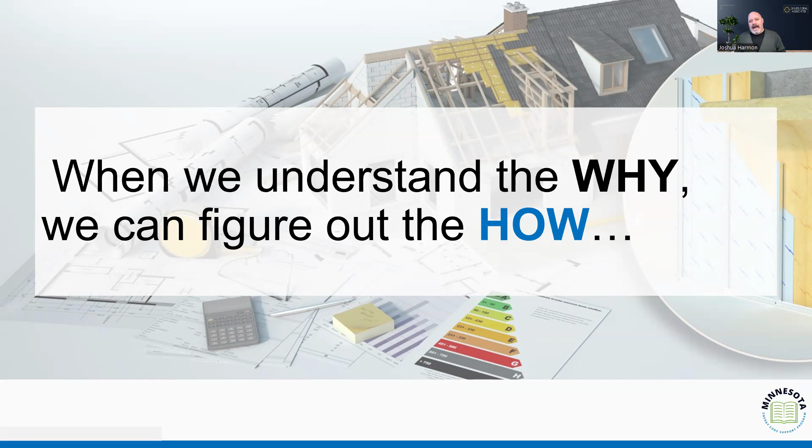So when we think about why we have a residential code, obviously we understand that it's to provide that minimum safeguard for the occupants of residential buildings across the state when it comes to things, and it's based on these minimum expectations when it comes to things like means of egress, structural stability, and light, ventilation, energy conservation, protection against fire and other hazards.

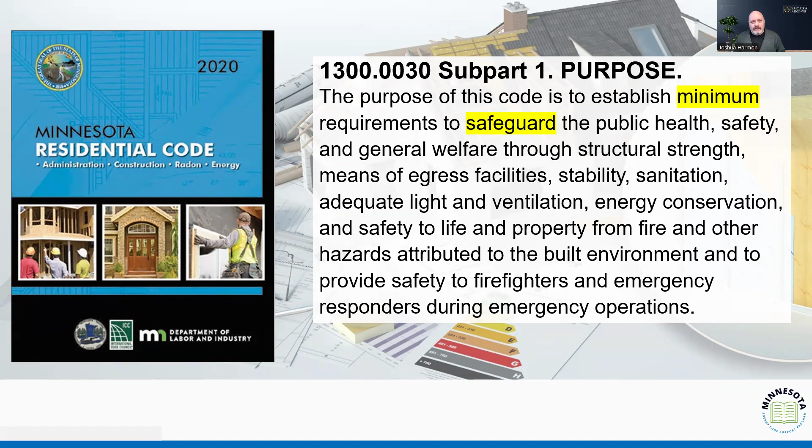So really what it's looking to provide is a consistent baseline for construction across the entirety of the state. I understand it's enforced at different levels in different places based on whether or not certain jurisdictions fall within enforcement apparatuses. But more importantly, this should be the standard that we should be confident buildings are being built to, to make sure that we provide safe housing to people across the state in all areas.

When we think about the relationship between the 2020 residential code and the energy provisions thereof in 1322, we understand that it was adopted as really more of a 2012 version of the International Energy Conservation Code. So that code, whether it was 2012, 2021, or 2024, is going to really look at how do we control things like heat loss, power utilized for illumination, and climate control, right?

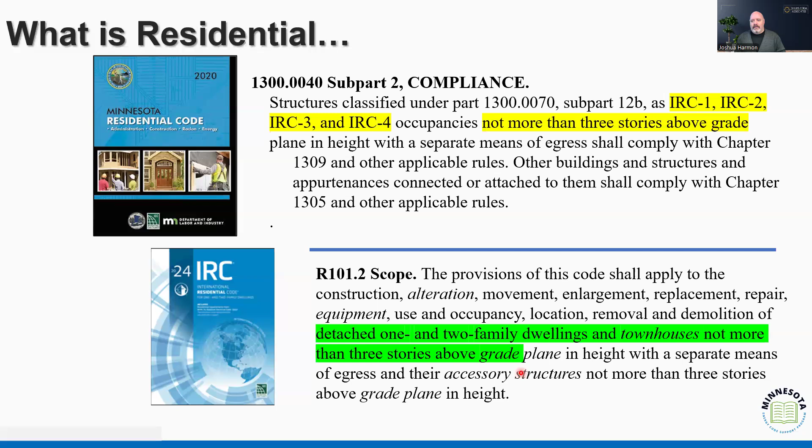Similarly, what we're trying to think about is how we're affecting residential from that perspective. One of the things that's important to understand as we transition, or consider transitioning, to a new definition or a new code, is to look at the definitions.

In the current definition, we talk about single family dwelling units, and we talk about townhouses as those series of units that are connected or grouped in a single building. So we're going to treat each one of those as separate buildings again, and that's kind of what the code is identifying for us.

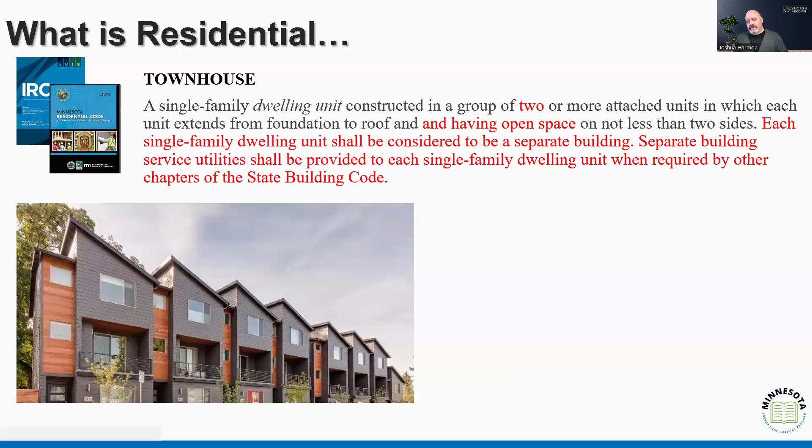That is again mirrored in what we see in the 21 and 24 residential codes, because we start to identify the townhouse as the building that consists of townhouse units, each one being its own separate unit. So the state is a little bit ahead of that, but it's just a little more clarified in the actual text of the code.

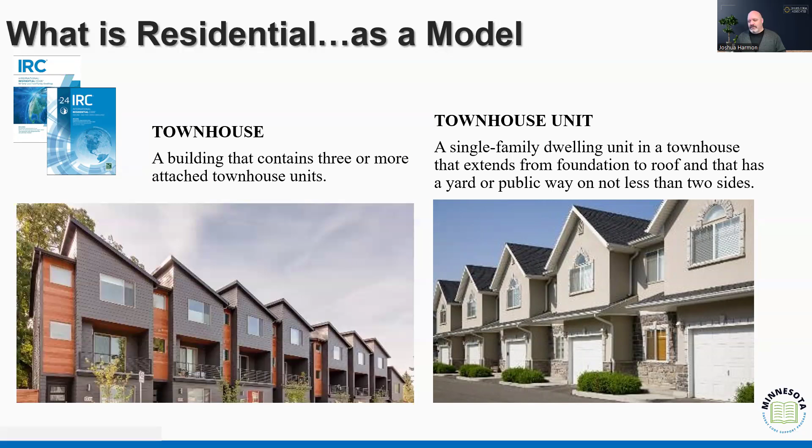So as a model, we kind of have an understanding of what is residential. When we think about it from the perspective of the energy code, looking at it as a model, we understand that the energy code applies within Minnesota to the residential building.

But as we see it identified in further versions of the energy code, we start to again see that expansion of what is residential. Residential becomes this kind of thought of not only the IRC 1s, 2s, 3s, and 4s, but also the group R2, R3, and R4 designations in the model code.

So in the model code, that's what it's intending to address - not just single family, multifamily, and townhouses, but it also goes into maybe the dormitories, the small motels, the transitory places that are again part of that group R2, R3, or R4, as long as they're 3 stories and less above grade.

When we have a mixed occupancy between residential and commercial, then obviously what the code says is residential provisions apply and commercial provisions apply to their respective areas.

I was doing a project, or a webinar, just a little bit ago on multifamily. The project we were looking at during this plan review session was multifamily housing with a retail space in one of the corners. So we had to separate them - the residential provisions apply to the multifamily, to the condos, and then the retail space follows the commercial. We understand that when it comes to energy conservation.

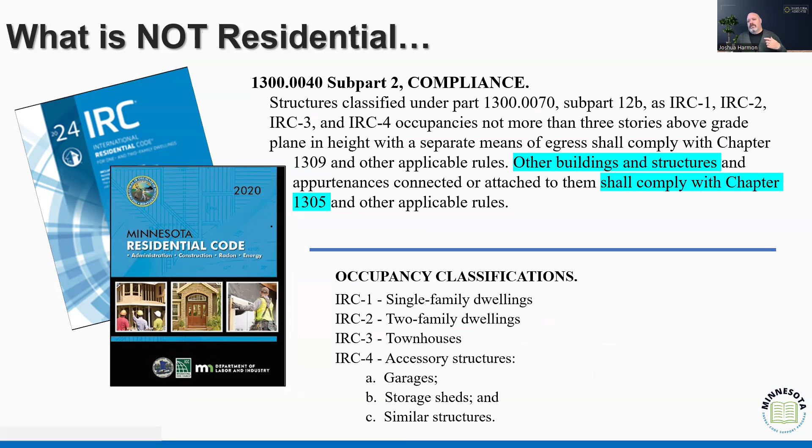When we look at, again, the code reminds us what are those IRC 1s, 2s, 3s, and 4s, and to kind of give us that idea of what's not within the context of the residential code when it comes to the construction components.

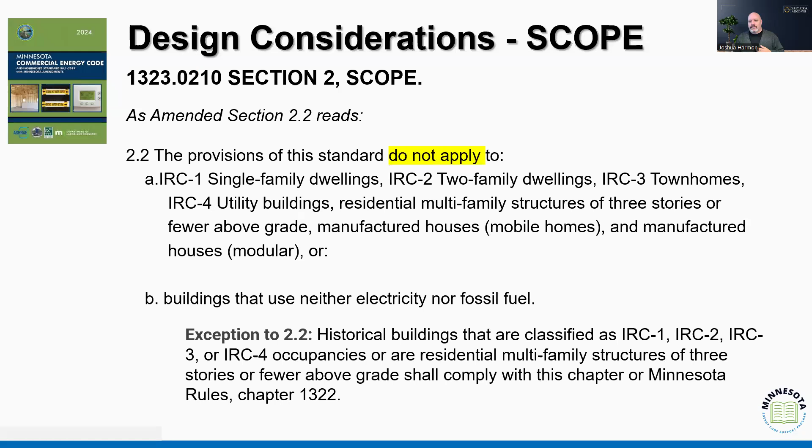When we think about it in the context of the commercial energy code, we've talked about this before - when does that code not apply? Well, it does not apply in those single family, 2-family, townhouses. And it also provides us this expectation of, or recognition of, what is residential.

Again, if we're looking at multifamily buildings, what is residential, what is commercial? Because that is a model, we start thinking about that group R2s - we're looking at the hotels, motels, those timeshares, apartments.

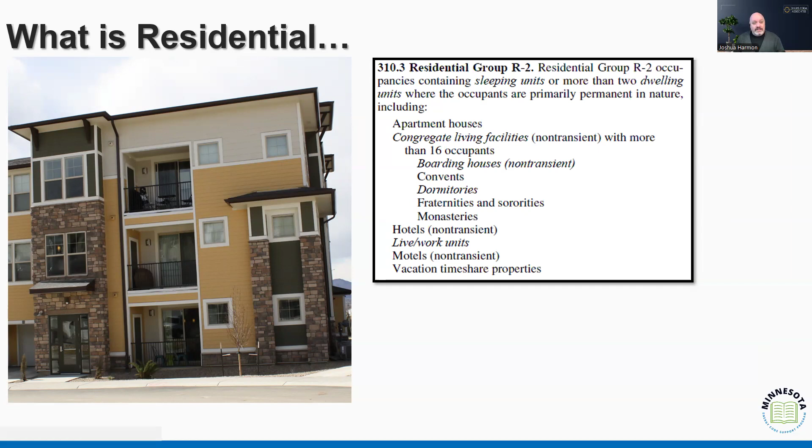Part of the conversation that sometimes gets brought up is, where do Airbnbs start to pull into this? Where do other types of accessory dwelling units start to pull in? We start talking about, is this residential, multifamily? Well, as long as it's under 3 stories, the energy code says it's all part of residential - again, expand the group R3s that are identified in the code, as well as those group R4s.

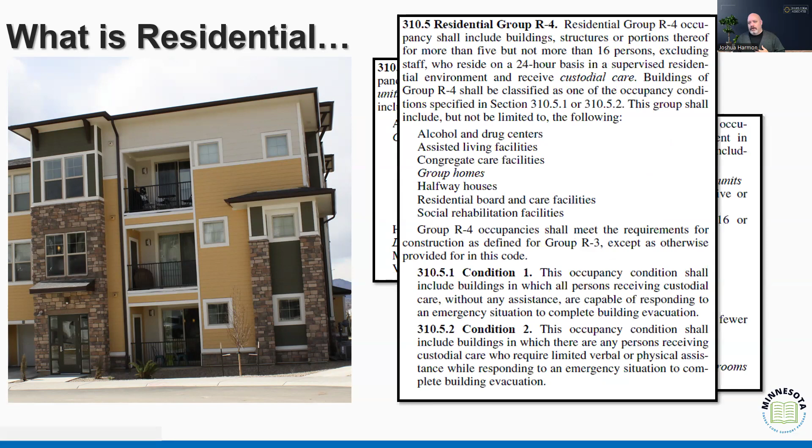So we think we understand when it applies, at least structurally. When does the energy code apply from a construction perspective? We understand the use classification. Now we're looking at it from a construction perspective, and we see that the energy code applies to new residential buildings, those additions, alterations, renovations, repairs, and changes in occupancy or use.

So if we're transitioning from, let's say, an assembly use, and we've bought a building and we're turning it into residential, then again it would need to comply. If we're changing the space conditioning, right? We start to think about taking that garage and turning it into a mother-in-law suite or an expanded bedroom. Now we're changing that conditioning, so we need to think about how the energy code applies. And again, like we talked about, mixed occupancy before.

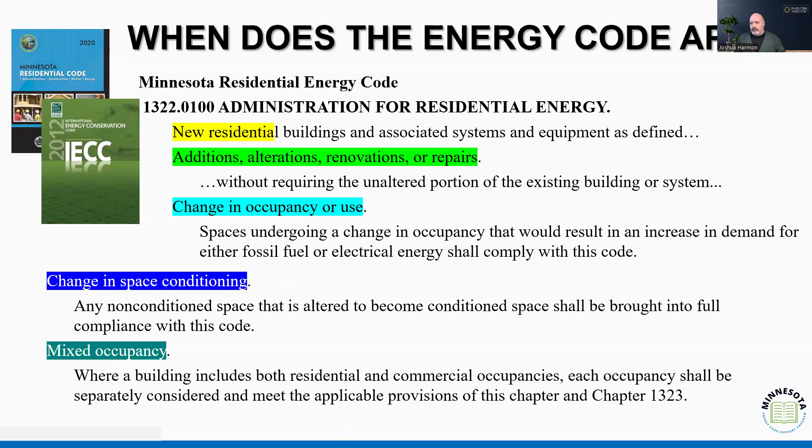So now we have this idea of when it applies and why it applies. Now let's talk about how it gets applied. When we look at what the energy code requires in 1322, we see the list of items. These are items we should be somewhat familiar with. We talk a lot about residential and commercial energy code compliance. We're looking for that basic understanding of how the system is going to comply with those four pillars we generally talk about: the insulation, the mechanical, and the power and lighting.

And then the service water heating systems come in as part of that mechanical and service water heating systems. When we look at the 2024, the major change we see from what currently exists in this particular section is the inclusion of that energy compliance path. We want to know very upfront which compliance path we're utilizing, because that's going to affect a lot of the evaluation we do during plan review and inspection of flexibility within a project.

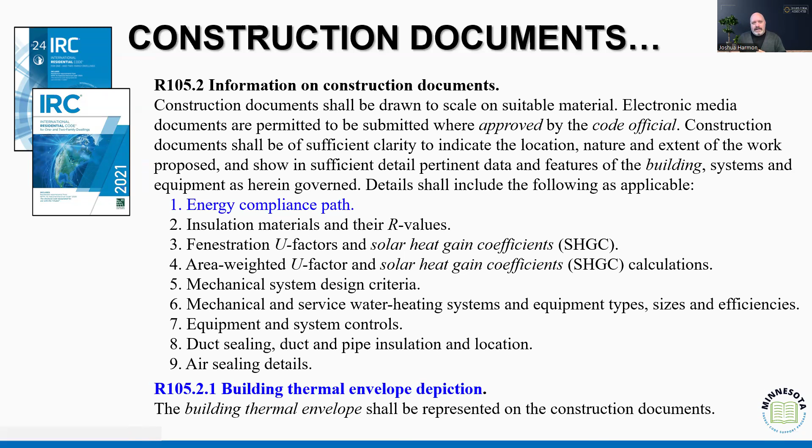One of the things we also see identified is this building thermal envelope depiction. That's one of those concepts that's really, to me, one of the more important things to identify, because it gives us that idea of what am I looking at within this structure to identify where that level of protection needs to be.

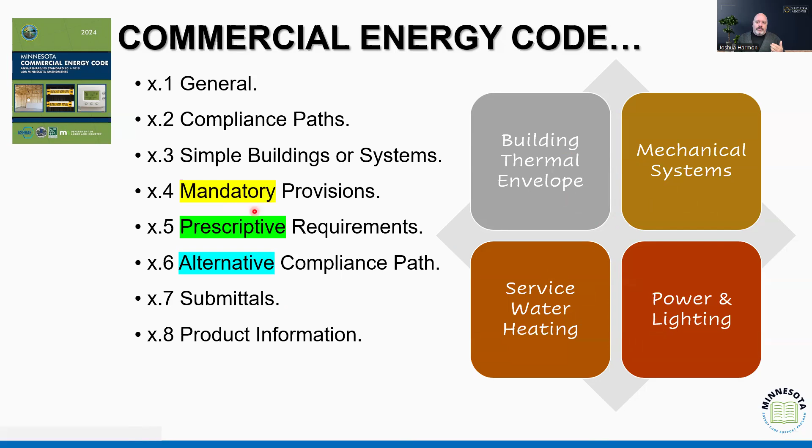When we look at our previous webinars, we talk a lot, obviously, about the commercial energy code. And in that concept, we see the four basic components, and those are identified in specific chapters. We know this in chapter 5, chapter 6, chapter 7, chapter 8 and 9. And then within each of those chapters, they have mandatory, prescriptive, and alternative compliance paths specified for each of those different sections.

When we look at both how the current energy code is organized, we see a very similar structural layout of the code. So we see it identified as those general requirements, where we usually find some basic understanding of how we should install, what are those minimum expectations associated with certain types of features.

But then we start really in chapter 4 to see it laid out as what is the building thermal envelope, what are those systems, both mechanical and service water, and then what's that power and lighting considerations in our simulated performance alternative. So more so in residential, because I tend to alternate service water heating with air barriers. Air barriers are going to be that critical component in residential that we don't always consider as much in commercial, although we know it's important to think about.

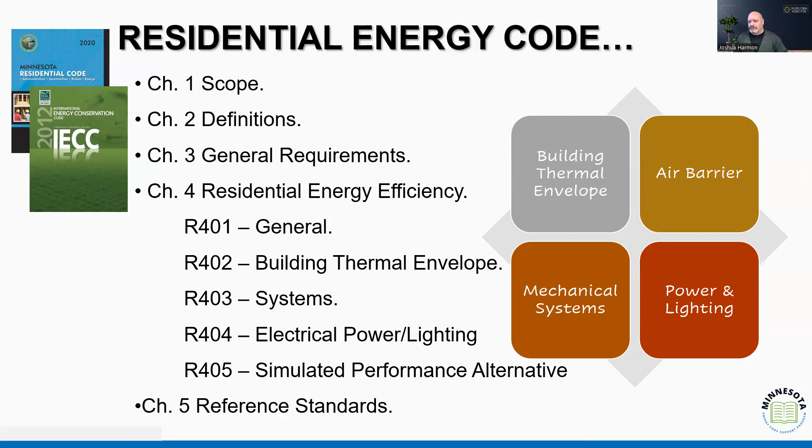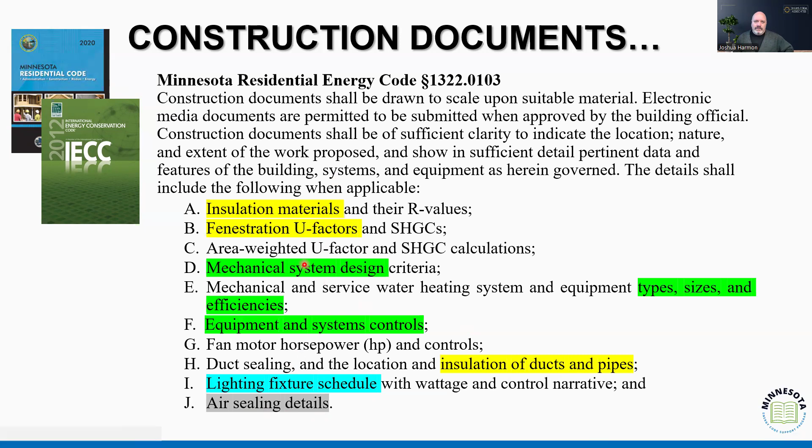When we start talking about that laid out on the 1322 list of information to be provided on construction documents, again we see it as insulation of both insulating materials, fenestrations, and ducts and pipes, as well as those mechanical systems, the lighting fixture schedule, and our air sealing details. So again, to me, those four things we're kind of looking for are: thermal resistance, air leakage, mechanical systems, and lighting systems.

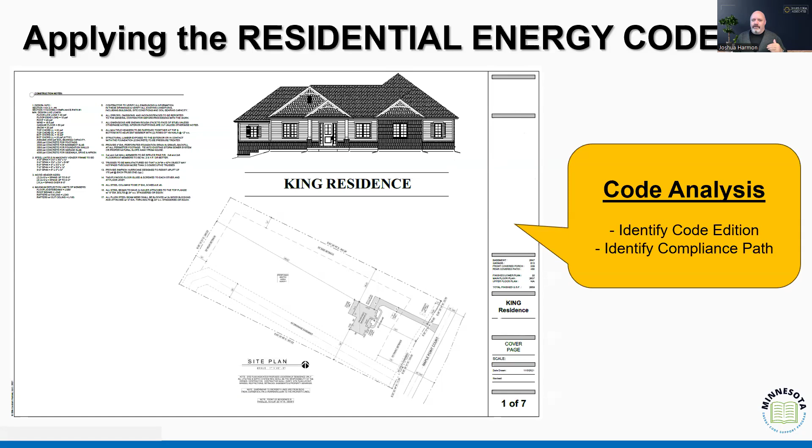So when we think about what we're doing, if we were applying the residential code to a project, the first thing we're going to look for is that code edition. We know they're going to reference the 2020 residential code, and by that they're also going to reference the residential energy conservation code. One of those things we hit on every time is going to be that identification of the compliance paths. We talked about compliance paths two weeks ago.

Remember, when we see it in 401.2 of the current adoption, we see two alternatives. The code tells us that we need to comply with all the mandatory provisions identified in the code. And then we need to determine, as far as compliance paths, whether we want to comply with the prescriptive sections or the performance alternative identified in section R405.

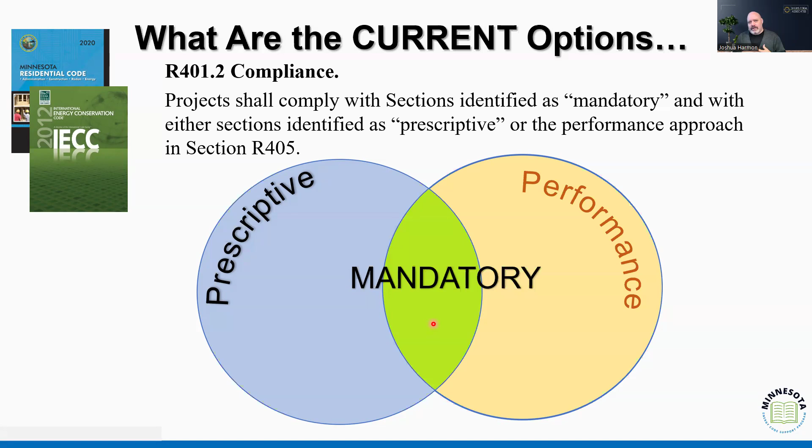If we go with the performance path, we still have to do the mandatory items. This has really, in a lot of ways, caused a level of confusion about what is mandatory in the code. Depending on the level of engagement with your building departments or builders, sometimes you get the attitude that if it's not mandatory, it doesn't need to be worried about. Having a mandatory versus a voluntary part of the code really starts to confuse people as to what's expected.

So in future versions of the code, as we move into 2018, 2021, and especially 2024, we start to see the term mandatory that's identified in some sections throughout the state's energy code get replaced by a table that goes with these specific energy compliance paths.

So we still have the prescriptive compliance path in the 24. That's the methodology, the thought process of tell me what's in the code and I'll do it. Now everything in the code has to be complied with. Not here's some mandatory, here's some prescriptive - nope, comply with everything you find, in section 405 or 402.3 and 4.

If we go to section 405, just like in the current code and the model code, we see that simulated building performance method - comparing the design of the proposal against the design of a building built using a table that exists within the code. Those two buildings will be simulated to operate for a full year and then compared based on a cost calculation - it's going to cost this much money to run this house as designed for one year, and we compare that against a similarly sized house following the model. We're looking for that relationship to see how the building costs differ, and it takes into account a variety of different things.

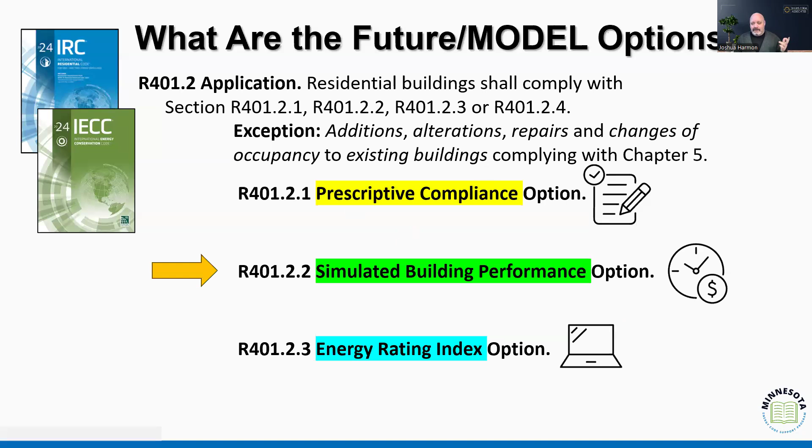Here, I've got extra slides to help. We talked a lot about this last week, but again, in the current code you're looking at it has to be less than or equal to. In the model code, it starts to get into - it has to improve beyond the annual energy cost of the model. So if you're going to choose one of these simulated performances, you're going to have to either be 80%, if you're using fuel, or 85% if you're using all electric.

And this got some calculations and additions for larger structures. Again, this is in the model - that's not necessarily to say it's what's going to be adopted, but it's just what's in the model.

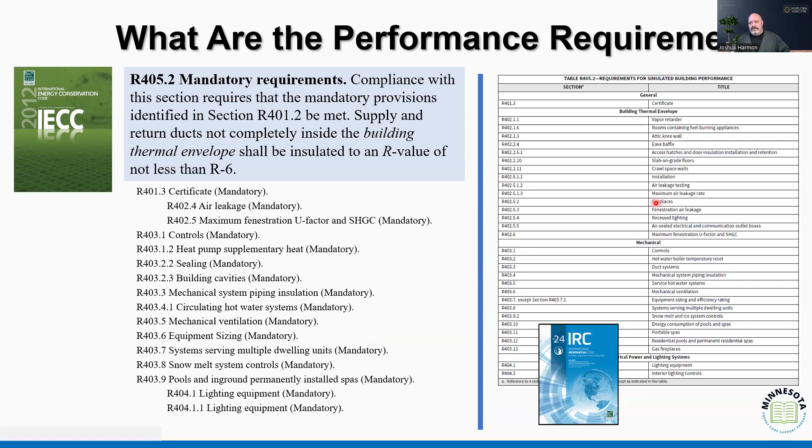So again, what we see in the 2012 code, you have the mandatory section, and it says comply with all the mandatory components - so you have to read through the code and figure out which sections have the word mandatory next to them. In the 21 and 24, they create a table and say comply with this table, and as we saw, comply with the table and meet these expectations when it comes to your energy performance.

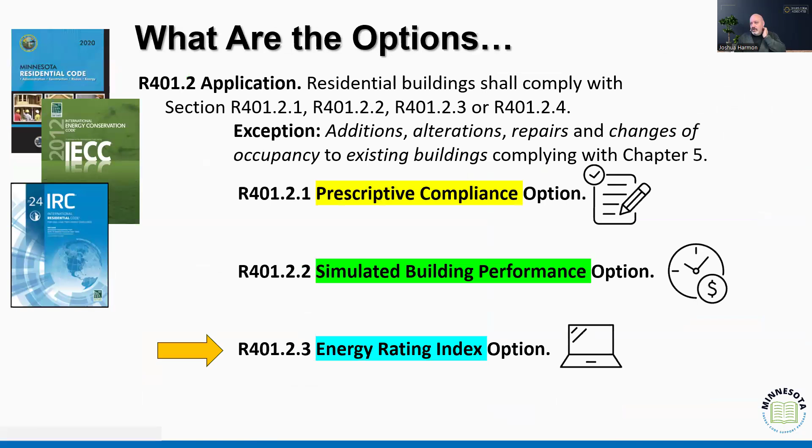Again, a new concept is going to be the ERI. There is no current ERI in the current code as adopted in Minnesota - if it was added, it would come in section 406. These are the values, based on a scale - on a 100-point scale, what are we looking for. These are the values either with or without on-site renewable energy. Again, in the model we don't know what the state's going to propose, but that's just to give us an idea of how those compliance paths work.

And based on those compliance paths, we again have that level of flexibility.

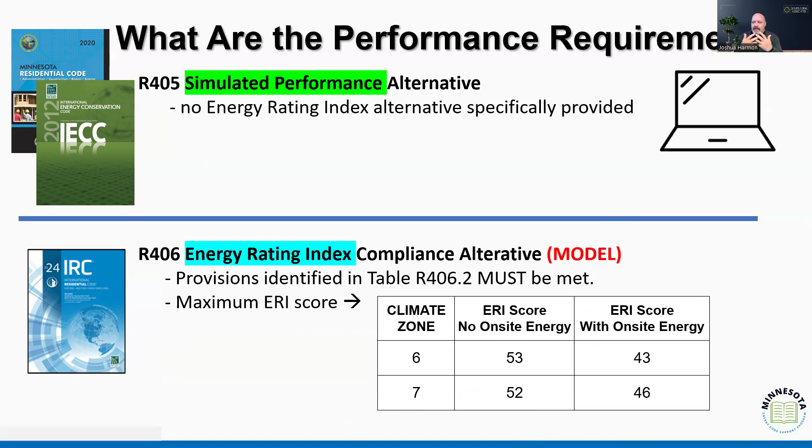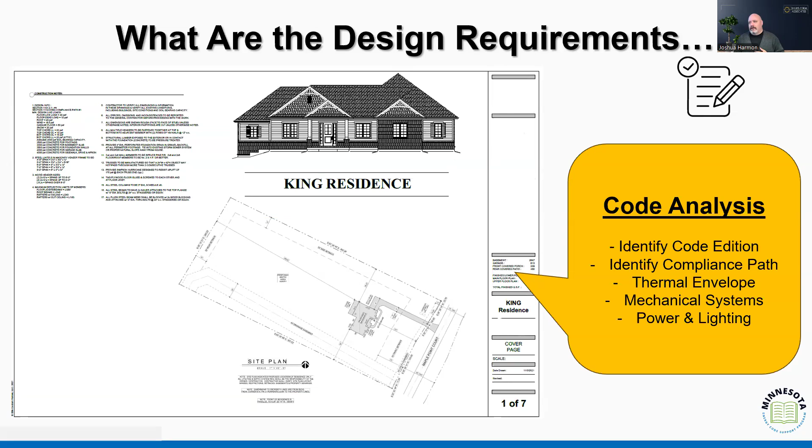When we think about understanding that, we have to ask what are some of those design requirements? Well, we have to think about the thermal envelope, the mechanical system, and the power and lighting. These are important concepts.

Now we need to think about the envelope's location. We need to think about the types of insulation materials and designs. We need to think about fenestration controls and air leakage controls.

Fenestration details and air leakage controls - that exists currently in the code. When we read our model codes in the 21 and the 24, that list really doesn't change much in terms of expectations. The number of what we might expect to find may change on one or two items, but for the most part, the concepts we're looking for are consistent.

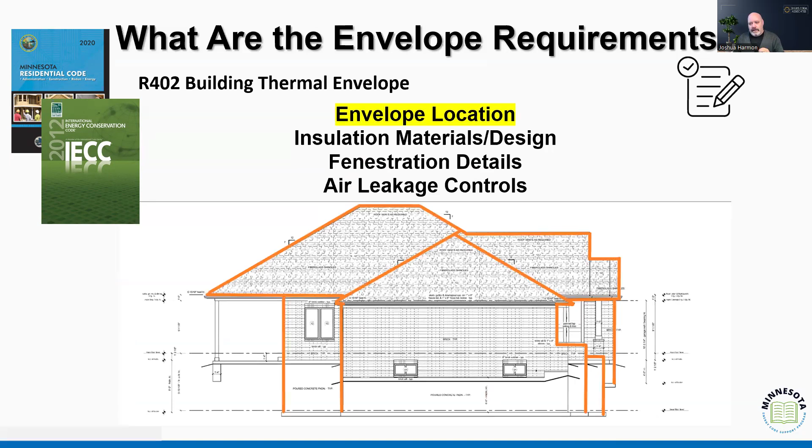So we want to know where that envelope location is, because we want to know what in this project I'm going to be looking at for my actual energy code compliance, my thermal envelope compliance. Before it was just, hey, is it insulated? Is this the right place to insulate? Do I know, do I not know?

That's why the code identifies the importance of the building thermal envelope depiction. Now we can start to say, okay, this is part of that system, this is where we're expecting to see consistent air barriers, whereas you may have spaces that aren't part of the thermal envelope because we're not having conditioned spaces. In commercial, we think about it in the context of semi-heated or unconditioned spaces that fall outside of that thermal envelope.

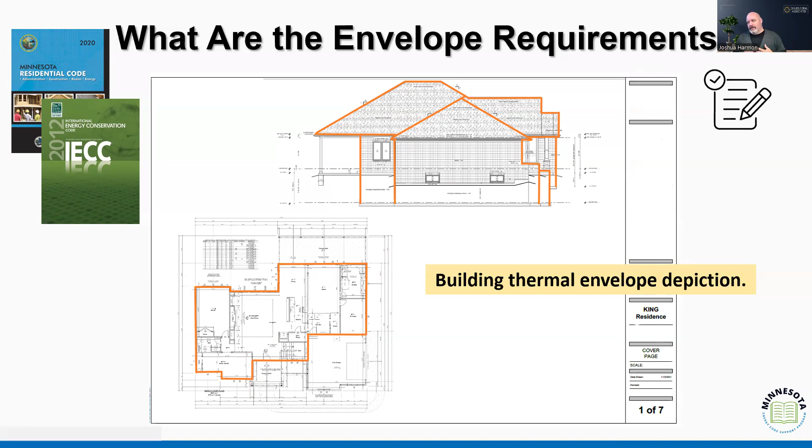We need to make sure our thermal envelope properly isolates that space. We don't want, if this is my living room and I've got unconditioned space coming in and it's not properly sealed, that air will move over and affect the temperature that climate controls within this space. If I want this to be 70 degrees but I'm bringing in 30-degree air, it's going to affect this occupancy and cause more energy use than is probably necessary.

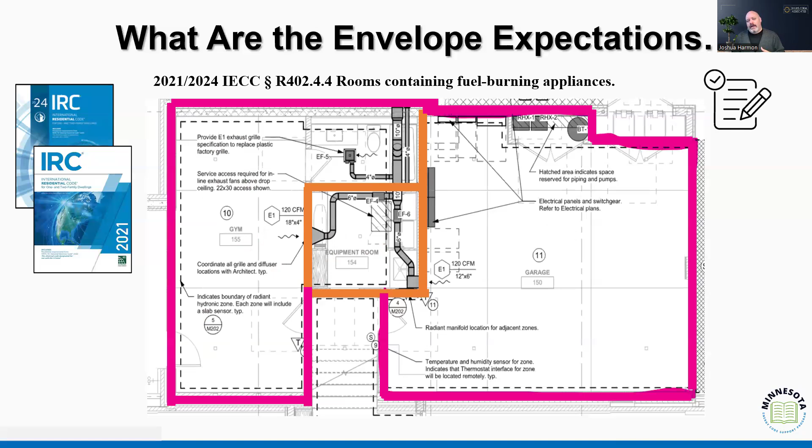That's where it's important to understand the expectations associated with the envelope, and depicting that is one part of the battle. The other part is identifying what insulating materials are going to be used. When we start thinking about insulation, whether in the current code or the model codes, what we're looking for in section 402 is an understanding of what that insulation is and what it's doing.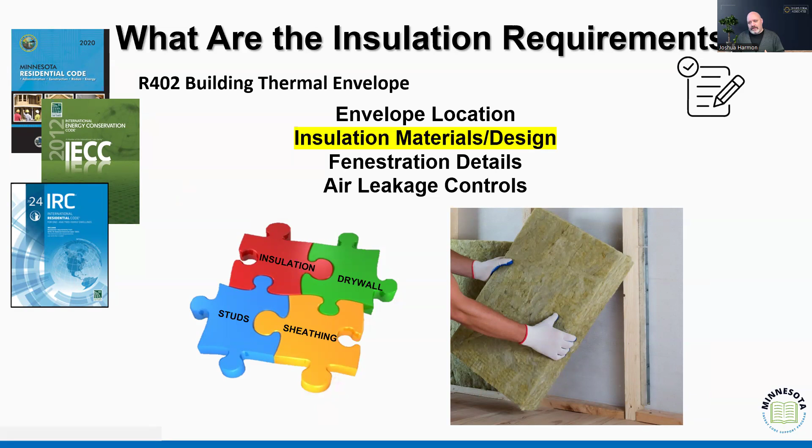Is it just an individual piece of material, or is it part of an assembly working together to resist heat transfer? We understand that insulation in and of itself resists heat transfer, but it doesn't completely stop airflow. Yes, you can slow the loss of heat through a wall system, through a piece of insulation, but if I blow it hard enough, or if there are enough holes in that space, air is going to transmit through that system.

So there's a relationship between the air barrier and the insulating material to create this pocket or protective layer around the conditioned space. We talked about it before - insulation in and of itself doesn't use energy. It doesn't use electric, it doesn't use gas. What it does is allow me to control what I've input into my house.

I put my daughter on the bus every morning, and she'll come to me at 8:05 and say, 'Daddy, it's time to go.' Her bus comes at 8:08 - it's perfect clockwork. So at 8:05 we go upstairs, stand by the door, and she'll open the door to go out. She has broken the thermal envelope. The thermal envelope exists, right? And I always have to say, Felicity, shut the door. We don't need to heat the outside, right?

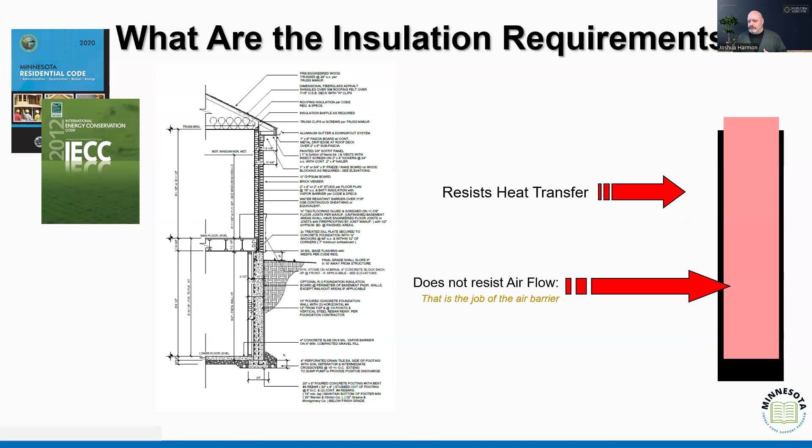That's the concept we see between the relationship of the thermal envelope and the air barrier. Regardless of how well that door may be insulated itself, when the assembly is broken and air moves through it, there's going to be heat loss, right? Those two values and concepts we see in the energy code apply in different ways. We see it as an R value - that individual material's ability to resist heat transfer - and as a U factor, which is the assembly's ability to mitigate heat loss. Heat resistance, heat loss.

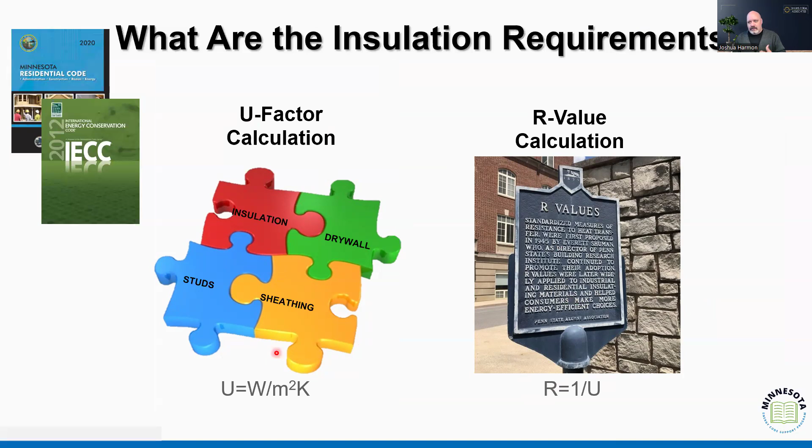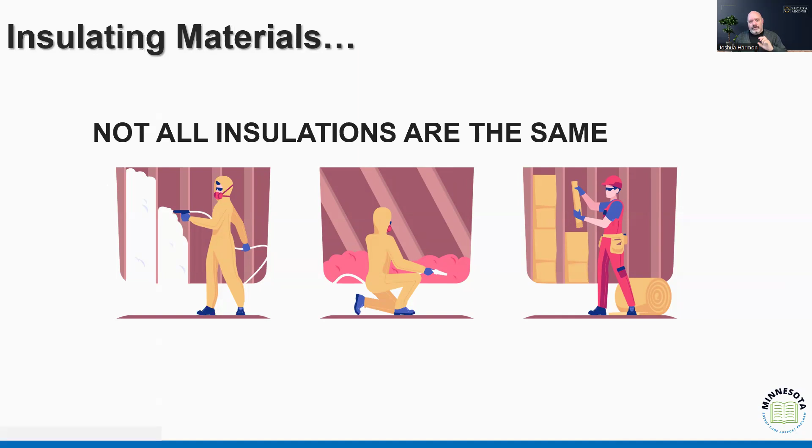We know those are calculated across an assembly if we're looking at the U factor. But we know that not all insulations are the same. Thinking about that in our application of these concepts within a design helps us have that flexibility. When we start thinking about using an R13, well, to use an R13 batt in a wall cavity, I need to do some things. Or if I want to only use 1 inch of insulating board, I need to replace those R values within the cavity to get to different U factors. I'm providing a level of flexibility there in what we're expecting to see.

When we apply that concept to buildings, in the current code, let's use the wall as an example. We're seeing an R21 in the wall, or an R20, or 13 with 5 continuous. If we were to apply this particular design to our climate zone 6, 13 plus 5, this is 3.5 - it's not 5. It does not meet the requirements.

However, if we were to do the math, looking at the U factor valuation for climate zone 6, we're looking for a 0.048, and this design is giving me a 0.057. It would pass - my maximum is 0.048. So no, it would not pass. I'm getting my math wrong, right? But we can see where maybe adding some additional insulation in the cavity, going to that R17, would allow me to maintain just the simple 3.5 continuous on the exterior.

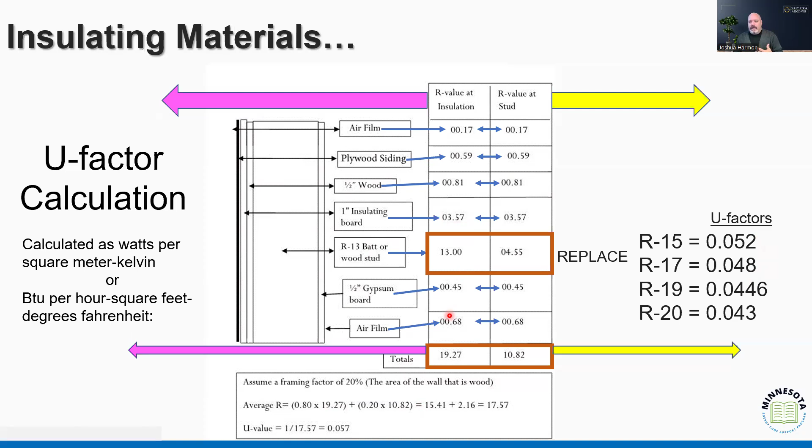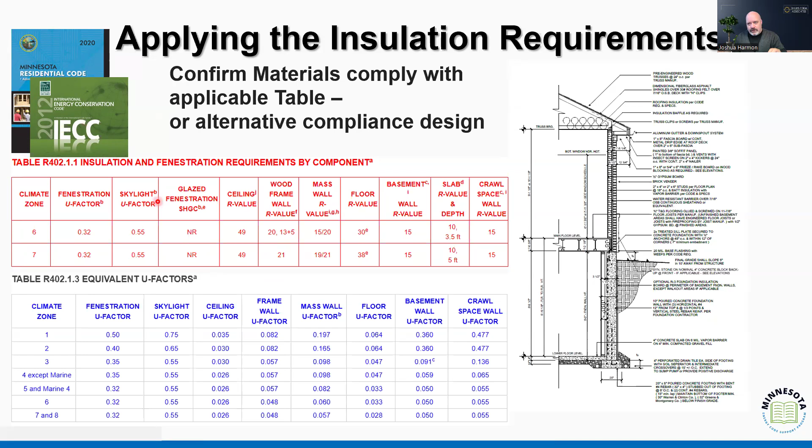And so again, that's where we start to talk about it, when we compare the current code with the model code - which again is the model, not necessarily what's been adopted - or we can always have those conversations in those tags to discuss what's going to be adopted. But if we look at the '24 code, just as an example, in that climate zone 6, where we originally saw a wall value of 13 plus 5, we see the increase in the continuous insulation to 13 plus 10, or the 20 plus 5.

What we're trying to do is protect and control more of the heat, more of the conditioned space within, from escaping. We're trying to increase the thermal resistance of our exterior wall, so that whoever is providing that heating and cooling for that space is controlling more of that heat loss. We see the reduction in, where's it at, wood frame wall - it goes from 0.048 in 2012 to 0.045, right? A 3/1000th of a difference.

We're talking about a U factor wise, a very small change, whereas someone may say, well, that's a whole nother inch or 2 inches of insulating board. Again, we might be focusing more on the U factor than we currently do on R values. That's kind of my point, if we think about where it goes in the future.

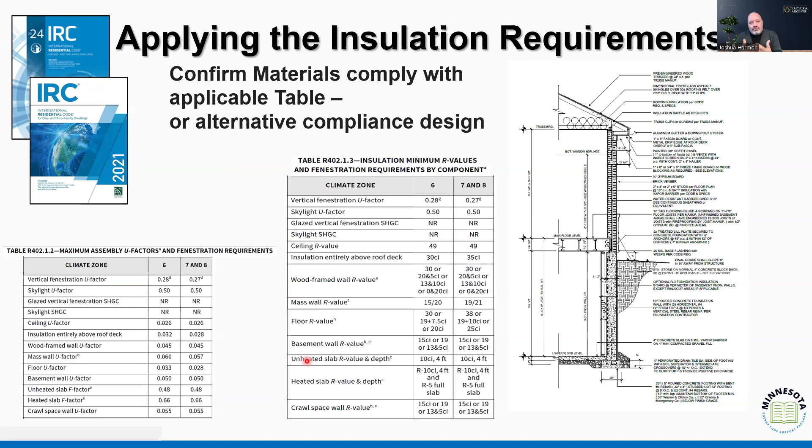Now we recognize again, increasing insulation in and of itself does not directly affect electric bills, right? Because part of it's a relationship between insulation and the air barrier to protect the insulation, the space within inside. If I had a 4 foot wide door that would protect anything from exiting as far as air leakage, and my daughter opens the door and leaves it open for 5 minutes, it does no good. So we've got to mitigate not just the insulation, but also the air barrier if we're going to be truly effective in controlling the environment inside our buildings.

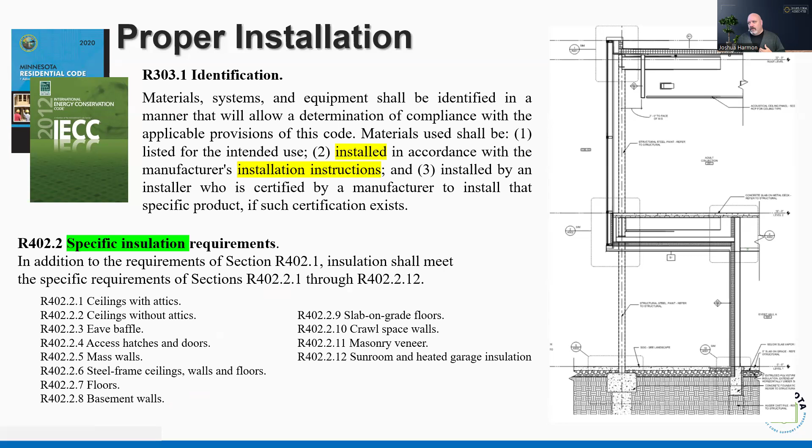Again, what the code tells us, whether it's the 21, the 12, the 24, all of them, the current code or potential future codes, is that the code gives us instructions on how insulation should be installed, both based on what the manufacturer's installation requires, as well as some specific insulation expectations. So what that's telling us is if I'm looking at a piece of material, I need to know what's being installed.

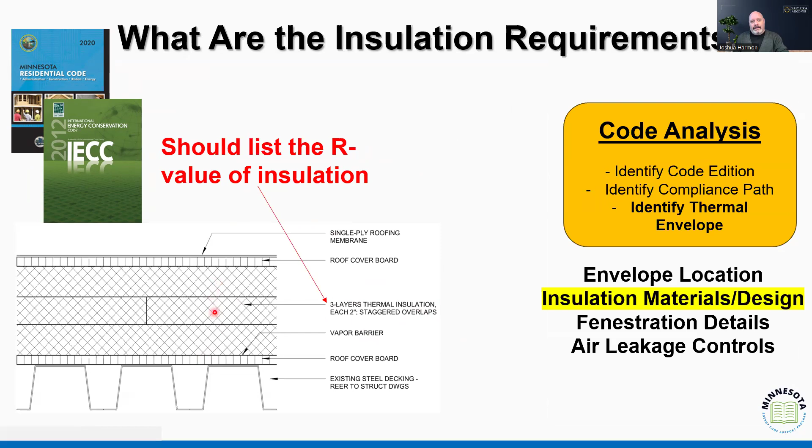Now, 3 layers of thermal insulation, 2 inches thick, staggered and overlapped, does not help me as much as knowing what is the R value. Knowing you put three pieces of insulation doesn't demonstrate compliance. If I'm going to demonstrate code compliance, I need that table that says what we're looking at on that roof is either a collective R25, or more importantly, that each of those 2 inches represents 10 R values. So if I have 3 sets of 10, now I've got 30.

So we need that level of specificity so that when my inspector is out in the field, he's not saying, oh yeah, they put down something. What was it? R5, R10, R12. Well, it was 3 pieces, that's all I know, they put down 3 pieces. Well, that's not going to support the project success. Let's just put it that way.

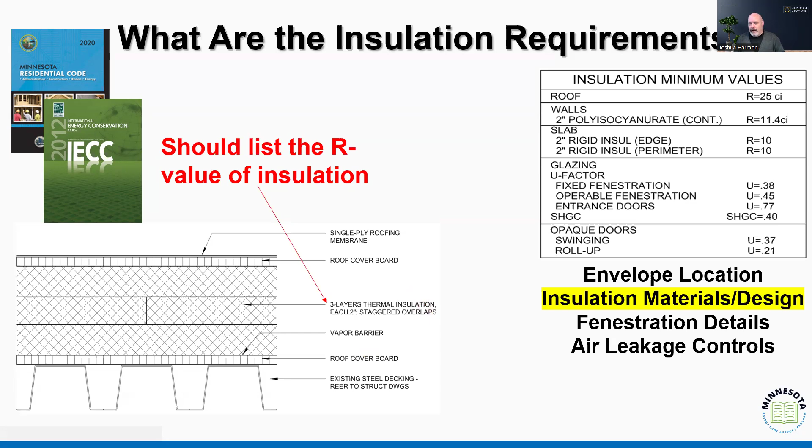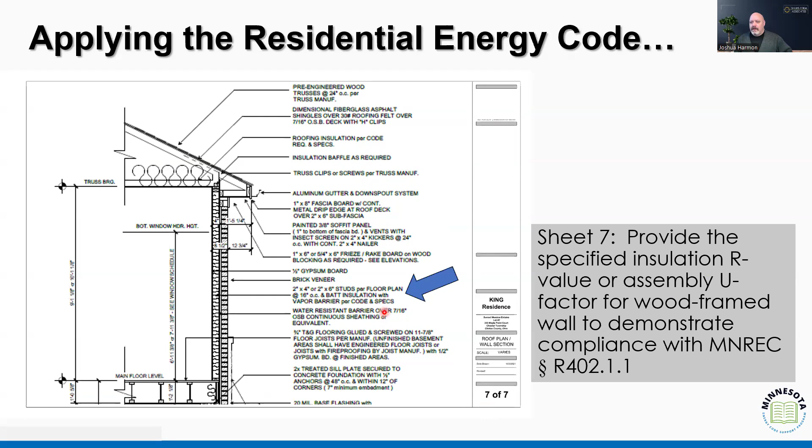And again, when we start to see codes identified, especially in residential, we see where it's per code in the specs. Well, you know what? Provide me the specified insulation value to demonstrate compliance with residential code section R402.1.1. The current code tells me I need to know these R values. So if the current code tells me I need to do this, it should be an expectation. Code should not be something where I comply sometimes and not other times. If we have a complete understanding and expectation of compliance, then we better accomplish it. So per code is not going to work, I need to know what that R value is.

When I look at the wall system, I see this here. This is telling me this is an optional R3 foundation insulation board at the perimeter. I see half a symbol, I don't even know if this is continuous insulation or batt insulation for the entire interior space. I don't know. So please provide the specific insulation R value or assembly U factor for the below grade basement wall to demonstrate compliance. Again, I need to know that what you're putting on the plans is what's going to be built in the field. And if it becomes a guessing game, then that's not helpful for the design.

Now, when we look at what that looks like in the future, again, the code starts to separate not just one value, but we start to see where we're talking about continuous versus cavity filled insulation in that below grade wall, that basement wall. So you might have, and part of the reason we see that difference, is again because of how it's designed.

If I'm putting in continuous insulation, it's continuous. If I'm putting in a cavity, that cavity assumes there's going to be a framing member that creates the cavity, so I have to calculate the impact of a 2x4 that only resists 4.5 degrees of heat through it versus an interior space that's filled with a cavity resisting a higher R value. Each piece of lumber has an R value per inch, so we're looking at it as an average weighted system.

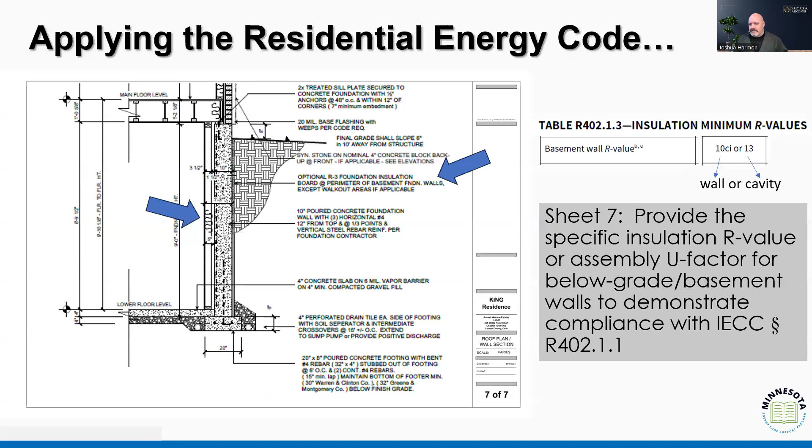When we think about fenestrations in residential, this is one of those things I personally always had to fight with until I got to the point where they realized I was always going to require it.

Instead of just providing me a simple table of all the windows that are going to be installed, we all have seen this, where we get the plan and it says the king's residence is going to have these windows, and these are the fixtures. This is the window schedule. I do not see in here where there's a U factor listed as part of it. There's no point in insulating this wall if both windows in this room are missing that, or have absolute gaps with air coming through.

So we want to provide, whether through a note or a schedule broken down by zone or type, whether casement, fixed, or operable, whatever they may be, a U factor, or a general maximum U factor written down. That way when I go out in the field, I know what I'm looking for and what I'm expecting to see as an inspector. When I walk up and see a window, I shouldn't just think 'it's a window, they put a window in, it matches the same size as the 3050 window, we're good.' I need to know what type of window I'm expecting to find.

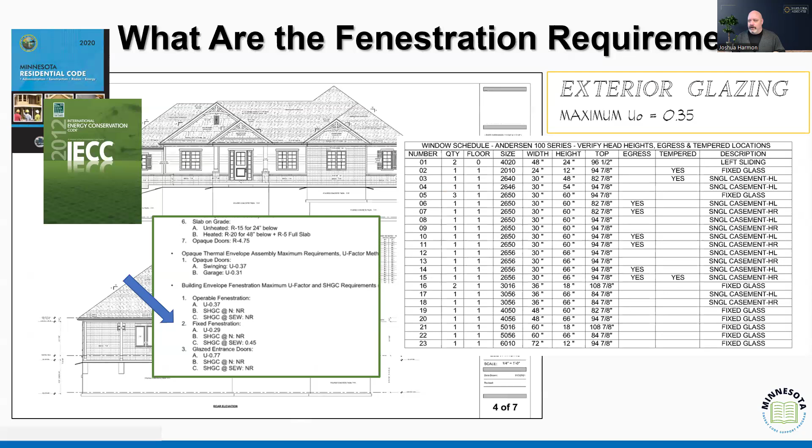Sometimes you'll find it in a nice schedule like this — I blew it up so you can read it better. This window and door note says the U factor is going to be 0.32 and the solar heat gain is going to be 0.32. Now, in my code, I'm not required to have a solar heat gain value, if we go back far enough... let's go forward — when I look at my current table, I'm not required to have a solar heat gain value, but in this design they put one down.

That may be because they're actually doing the math behind the mechanical system design, since the solar heat gain allows it to accept at most 32% of the sun's radiative energy into the space. That's going to both heat during the summer, or increase the heating capacity, the latent heating expectations, and that'll impact how much I need to cool and how much I need to heat based on how much radiative heat is getting into my building through the window systems.

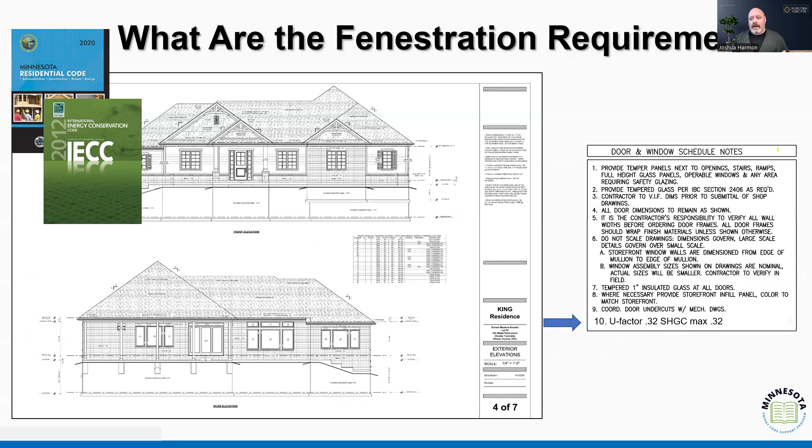If it were me, and I had this plan and approved it, and I showed up and the windows were a 0.32 U factor and a 0.38 solar heat gain, I would make them call that contractor, call that designer to make sure the equipment is going to be okay and properly sized. Even though my code says I don't have to have a solar heat gain, part of my approved plan says it's supposed to be there, so I want to make sure this whole system works together.

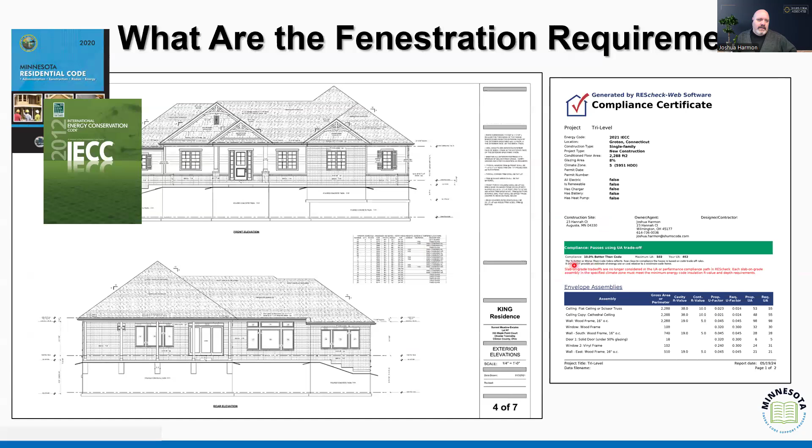Sometimes you'll get that through a res check, very similar to a com check, that provides those different values. What we're going to be doing, seeing how it passes, is verifying that the value we see here matches what we're seeing on the plans. Because every inspection I've ever done, I have never seen a contractor standing at the site holding up their com check or res check — they've got their plans. So the res check or com check is not something they're looking at in the field.

They're going to be looking at the plans. If the plans say I'm only putting in a 0.37, but the com check says I'm putting in a 0.24, I need to make that clear. I need a comment that says it appears to be an inconsistency between the proposed U factor identified in the com check and the res check.

And the proposed U factor on page A7, right? And again, we know what the code is expecting. Great point to put out there. That again, it may not be required by the table to demonstrate compliance, but it is required by the certificate. Good point, Nicholas, on that one.

So again, we're going to want these values, and it's not that the value is hard to come by, right? When we start talking about these values are provided by the manufacturer. They know what these values are. It's just a question of adding it to the appropriate place on the document. Again, to me, it's one of those things I always think is important.

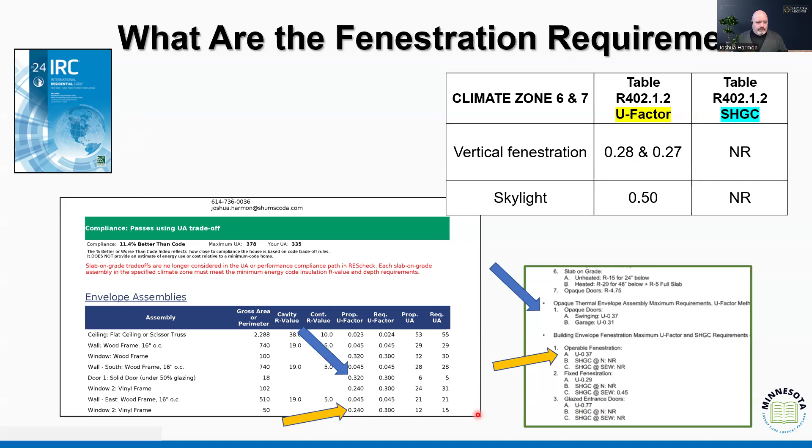This is when I'm on site and I'm verifying that this window is supposed to be a 0.24 on the east wall, and I show up and it says 0.38, 0.30. As an inspector, I can now say, hey, the window doesn't match, right? This isn't the right window. Call the architect, submit a revision, whatever we got to do.

Because again, this can affect the mechanical load, right? And again, I'm not going to sit there and do the math and say how much it's going to affect the mechanical load. I'm going to say it can, and that's why we have a code. You need to communicate with your designer and have him verify that this system still meets the requirements utilizing this type of window, or he can tell you to replace it.

And again, remember, the client, the citizen in our community that is paying us for that window, if they're being shortchanged, not by intention, but maybe by just reality, this one came in and they thought they could use it, then you're not protecting the public from that, right? The public is expecting, the owner's expecting that window to perform as it was proposed in their design, whether they understand all the nuts and bolts of it or not, right?

The same way I expect that when I push the button in my car to turn the seat warmer on, I expect it to work. I don't need to understand why it doesn't work. I just need to expect that it does work. And the same concept when it comes to our buildings, right?

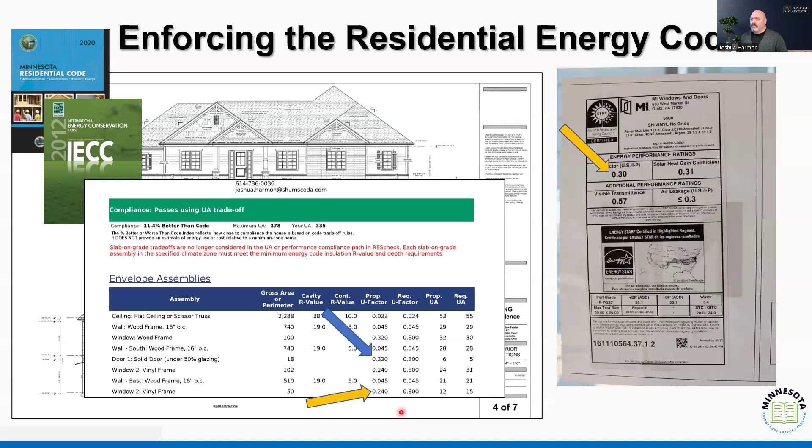And the same thing when it comes to air leakage, right? Within that envelope, we look at the location of the envelope, the insulation of the envelope, the fenestration that's within that envelope, and then the air leakage controls.

Now, in the current code, we have that expectation of that 3 air changes per hour in climate zones 3 through 8, right? Sometimes what I like to always see on the plans is a recognition that testing is going to be done, that we all are of the same understanding that the maximum air leakage rate shall not exceed 3.0. Knowing there's a test coming, make sure that I prepare for it, right? If I know I have to pass this test and there's going to be somebody coming out who's going to independently verify, then I'm going to expect that a written report be provided, right?

When we look at what the 24 code does, in the 24, now 23 it stays at 3, 21 it stays at 3, 24 it goes to 2.5 air changes per hour for climate zones 6 through 8, right? So again, we're seeing a decrease in the amount of leakage, because what we're trying to do is control and manage all the condition space within inside that building, right?

This is an example of a project where they not only wrote all this out, which again could be word for word from the code, they also provided all the insulation, air barrier installation table. Again, don't trust that someone's going to read it off the book. Put it on the plan.

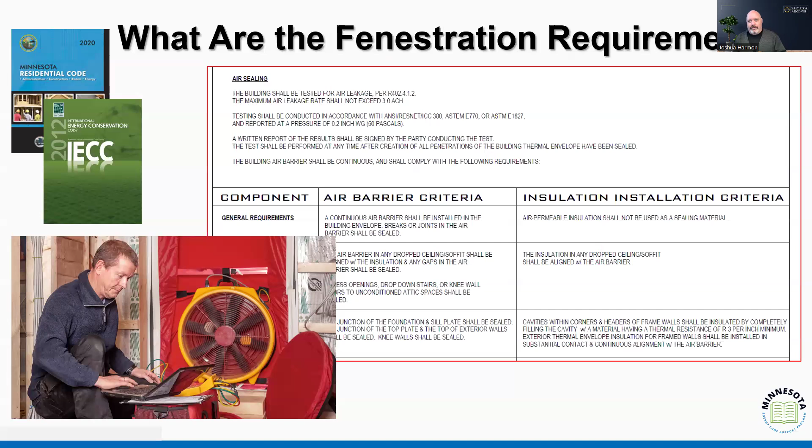The code says that's a minimum expectation. You can exceed the 3 air changes per hour, or you can exceed the model's 2.5 for the 2024 code, but the minimum is that we allow for 3 air changes per hour of uncontrolled air loss. That's the thing that gets me, that's uncontrolled air loss at 3 air changes per hour. Depending on the size of your home, the amount of air leakage, the number of CFMs of lost air, is ridiculous.

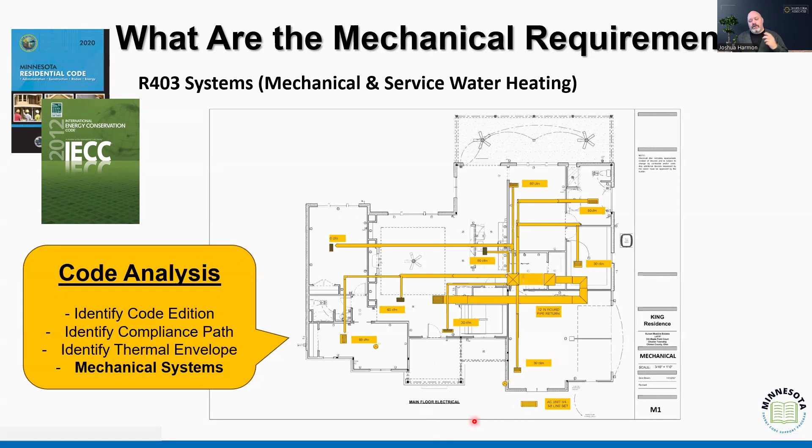When we look at residential requirements within the energy code, in the current code we have mandatory and prescriptive components that identify this. Whether we're looking at the 2012 or the 2021, we're looking again at proper design, equipment efficiency, duct distribution, and system controls. We want to make sure you've thought about the design, that the equipment meets the requirements for efficiency, and that we have an effective system for controlling when and where that mechanical system operates. Those same concepts apply in the 2024.

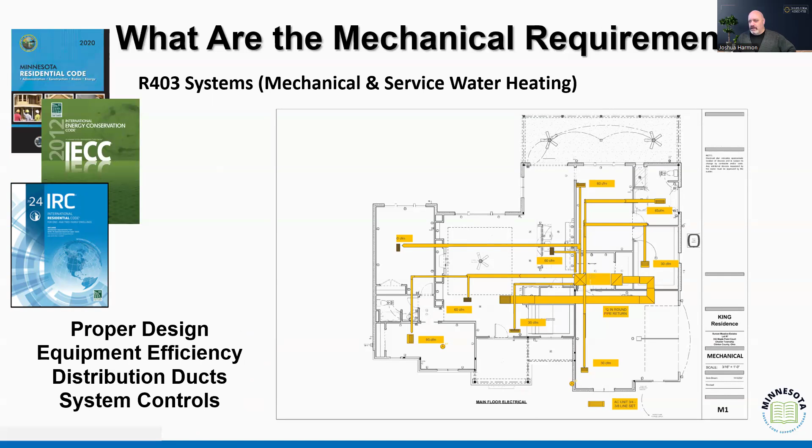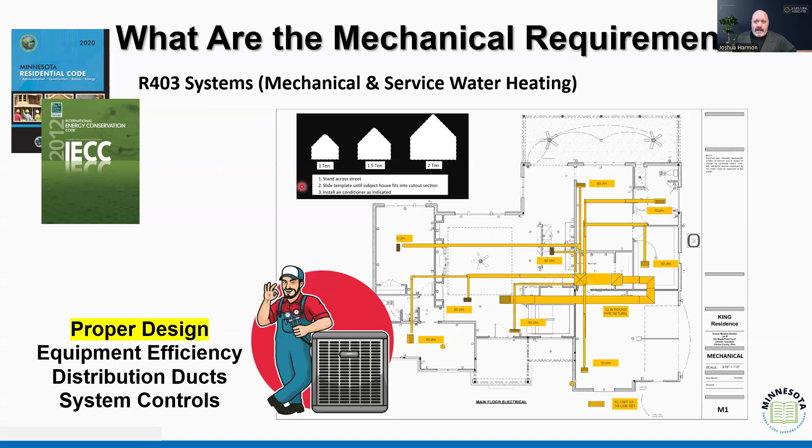Again, when we're thinking about mechanical design, we're not trusting Murray, my favorite mechanical installer, to tell me that based on his little chart, this deserves a 1.5 ton unit. No. The current 2020 residential code, including its residential energy provisions, requires me to have a balanced mechanical ventilation system that is within 10% of the system's design capacity.

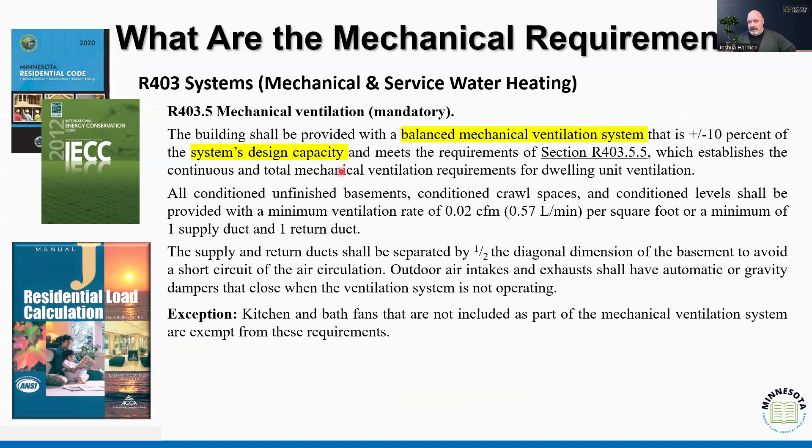And when we look at that, what that's telling us is we also need to look at the climate design conditions that it reflects. That design isn't hard, it's not asking for a lot, just make sure that this system accounts for the fact it's being placed in Monticello versus Duluth versus Rochester versus Ohio.

Make sure we've provided either the heating and cooling load calculations based on the Manual J, or others -- where does it say it? Other accepted engineering practices. So you can use the ASHRAE Handbook of Fundamentals, you can use the Manual J, or some other system to demonstrate that you've evaluated the heating and cooling load, and that the equipment you're placing in that building is sized to meet that load.

Oversizing should not exceed 40% of the load calculation for heating and 15% for cooling. Just because a 1.5 ton unit will work does not mean it's okay to put in a 3 ton unit. What that's going to create is more inefficiency, and it's going to create equipment failure.

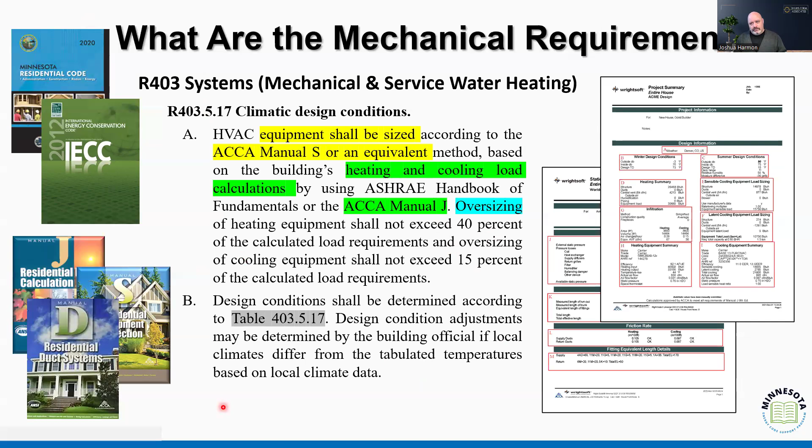So this is part of the current expectation of the energy code, and it doesn't go away. The current energy code tells us that when we think about equipment sizing, we base it on the Manual S, based on the loads that came from the Manual J or other approved heating and cooling calculation methodologies. So we're making sure this piece of equipment meets the requirements. Then there are federal regulations that regulate the efficiency of that equipment.

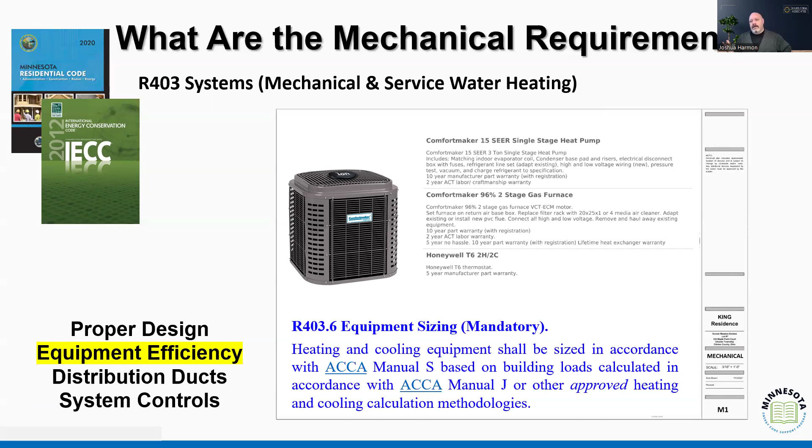In commercial, we've got the table, we've got our tables to review. In residential, it just has to meet the expectation of federal law when it comes to the manufacture of these types of equipment. Nine times out of ten, it's been my experience that anything still around is probably going to meet those expectations. But again, we want to make sure they meet the EPA and DOE requirements for efficiency.

When we think about that duct system, the code tells us we have to think about insulation of those ducts, sealing of the ducts, and the prohibition of utilizing building cavities as part of that duct system. The table in 403.2.1 tells us how thick that insulation needs to be. And guess what? When we look at it in the future, that doesn't really change much when it comes to the expectations associated with that duct system.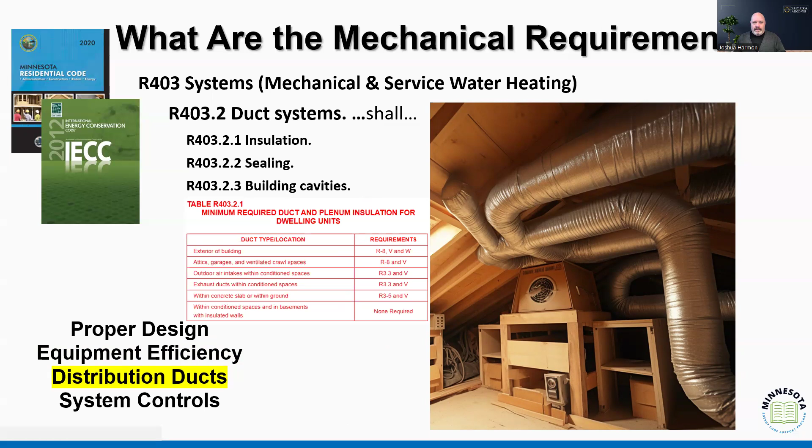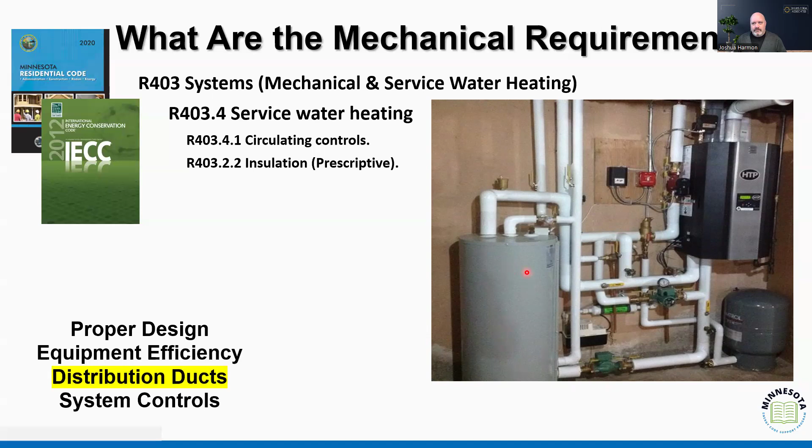When we look at mechanical systems in the current code, again, we have circulating controls and insulation for the prescriptive value. We want to make sure we're considering how we mitigate unintended or unnecessary reheating of storage tanks by controlling circulation in those hot water systems.

When we look at the '21 and '24, we expand the way we identify the sections associated with those duct systems. But if we really think about it, we look at the prohibition regarding building cavities as part of the system, the requirement for sealing. But now we have this expectation for duct testing and air and duct leakage, because what's the point of sealing it if we don't verify it? It should be relatively simple to make sure it's maintaining that pressure. If I had a balloon that popped every time I blew it up, I would know there's something wrong with that balloon.

It goes further and explains what to do when that ductwork is located outside of the conditioned space versus inside the conditioned space, and what it means to be buried within the ceiling insulation, because there was some confusion at one point about what buried meant, and people thought, how is it in the ceiling if it's buried below ground? Two different concepts. So it just further expands our understanding.

If it's inside the conditioned space, we don't need to insulate, and our expectation of air leakage or duct leakage is less, because it's within the conditioned space. There are conversations about what 'within' means. If that duct is in the thermal envelope, is it within the conditioned space? No. It's in the envelope, not within. In versus within - it's an important difference.

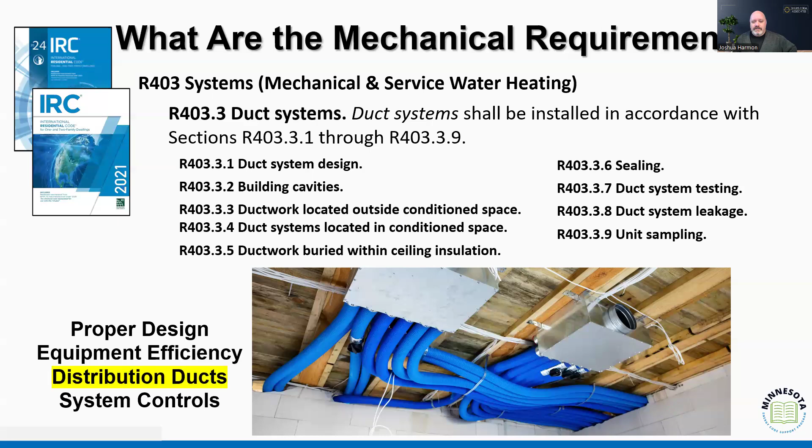Maybe for those of you participating or who haven't participated in either the residential TAG or any of the TAGs currently going on - I was in two of them this week, listening in - I would suggest you participate if you get the opportunity. It's important to be part of those conversations moving forward in all areas of the code, not just energy code.

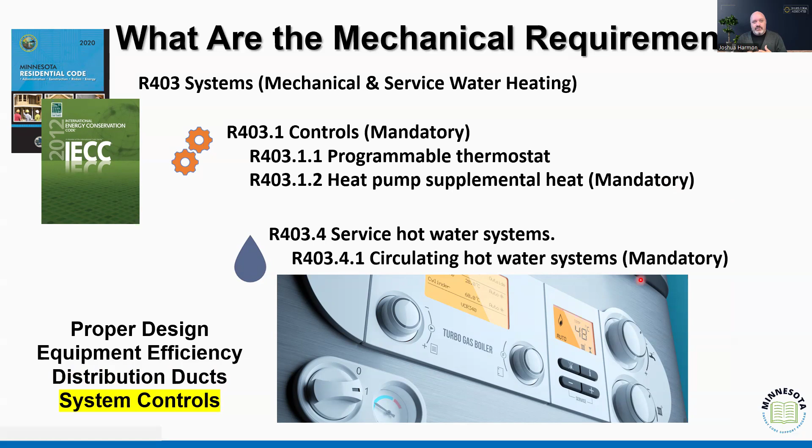When we talk about those controls, the old code reminded us we need a programmable thermostat, and that we needed a control that disabled supplemental heat when the cooling system was operating, or that we had hot water circulating system controls implemented as part of that system. That continues to be part of the code's expectations moving forward.

The current code identifies special equipment. I'm just going to highlight swimming pools, snow melt, and PV systems. When we think about these in the 2024 energy code, at least for these two items - the snow melt and the pools - those continue to exist and don't change very much.

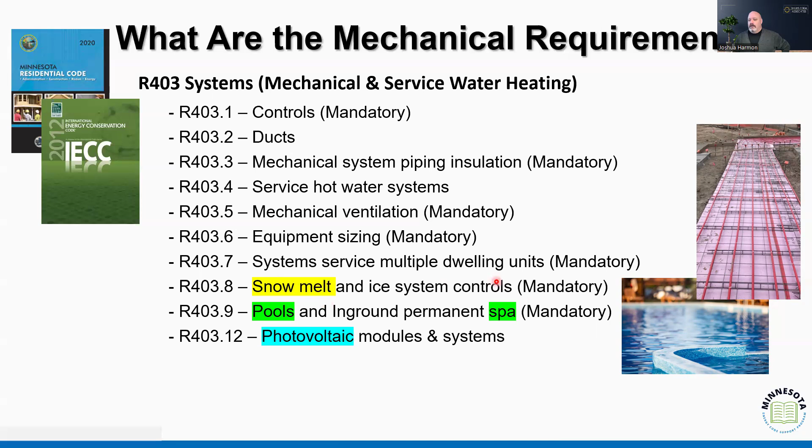We've got a few minutes left to talk about power and lighting. Power and lighting is one of those areas of expansion in the model codes.

In the current code, all we care about is fixture efficacy - 75% of the lamps have to be high efficacy bulbs. That's it. It also requires that if we have fuel gas lighting, it doesn't have a continuously burning pilot light - if you have one of these decorative features, or a light system that utilizes oil or some kind of fuel gas, it's not constantly running when it's not being utilized.

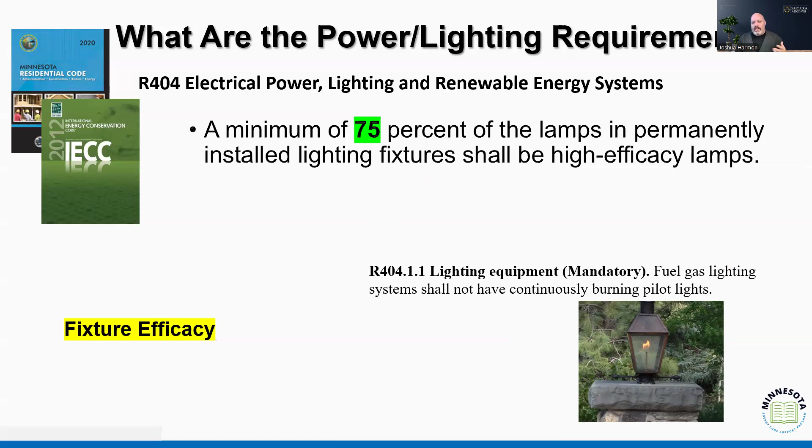That translates over time into a lot of what, for those of us who do code, know as black bars. In the 2021 code, you start to see a lot of the black bar change. In 2024, that continues to move over. Now we've expanded from just asking how efficient is that fixture, to now what kind of controls are we using, what kind of exterior lighting, what kind of controls are we looking at there. Again, this is a model, not necessarily what's been adopted, but model just to think about.

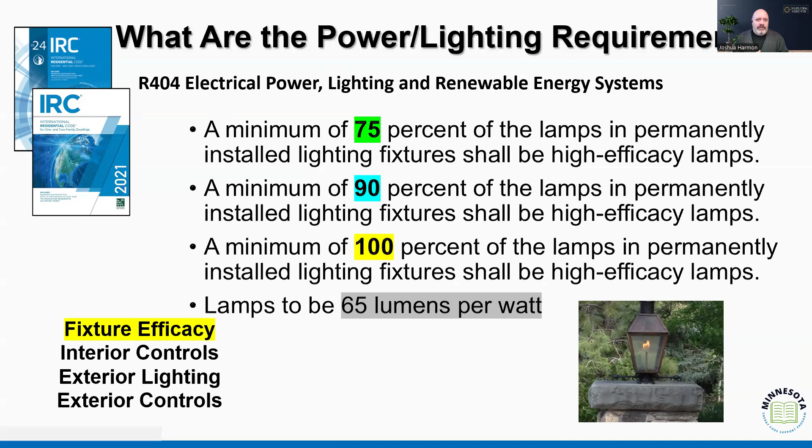So when we think about efficacy, we went from the current 75 to 90% in 2018, to 100% in the 2021, to now beyond 100. We have the specific lumen per watt calculation for those lamps in the 2024. So it's just expanding the high efficacy component of the lighting fixture. That's what changes over time.

We look at it from the interior controls side. What we start to see happen in the 2021, 2024 is that habitable spaces have to have either a manual dimmer or an automatic control.

I use my daughter as a perfect example. I've probably used it before, I'll use it again. For her 10th birthday I bought her—I always got complaints from people about the fact she leaves her light on, you can see it in the middle of the night when we're not home. So I bought her for her 10th birthday an occupancy sensor for her room, and it was the best birthday present I ever bought myself, really, for her. It was a good hearted laugh for me. So she now has an occupancy sensor in her room. Guess what, it turns her light off when she's not in there. And when she's in there walking around, doing things, or sitting at her little desk doing her makeup and talking to her friends, it doesn't turn off the light on her. When she sleeps, the light goes off.

We've purchased the right equipment, it works effectively. What the code says in the future is make sure people have the ability to either dim the lights themselves or have an automatic sensor. I chose—and if it were me, if you could put a code in there that says for anybody under the age of 12 their bedroom must have an automatic shut-off control, I would support that code amendment. Just saying it. Personally, not as anybody else, just personally, anybody under the age of 12 should have an automatic control.

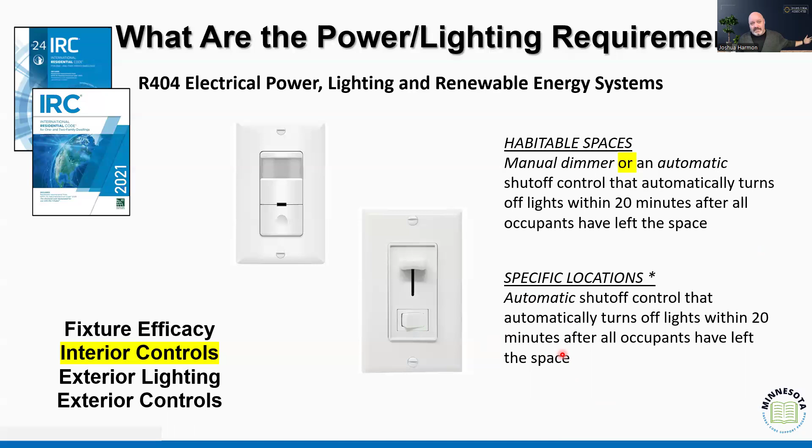It also identifies specific locations like garages, unfinished basements, laundry rooms, and utility rooms as places where we should have these automatic sensors as well. So again, if we forgot to turn the light off in the garage, it doesn't stay on all night long, it shuts itself off. Again, energy conservation, energy consumption monitoring in a way. So what we'll see is those dimmer switches identified in our plans. We want to make sure the right controls are in the right places. It's not as problematic as we think.

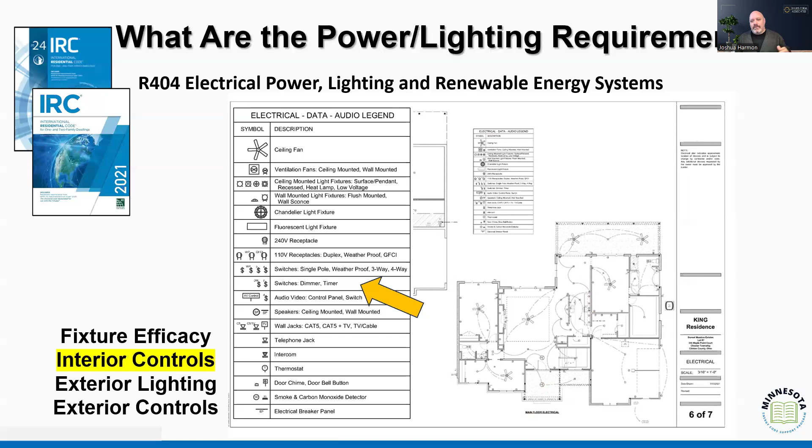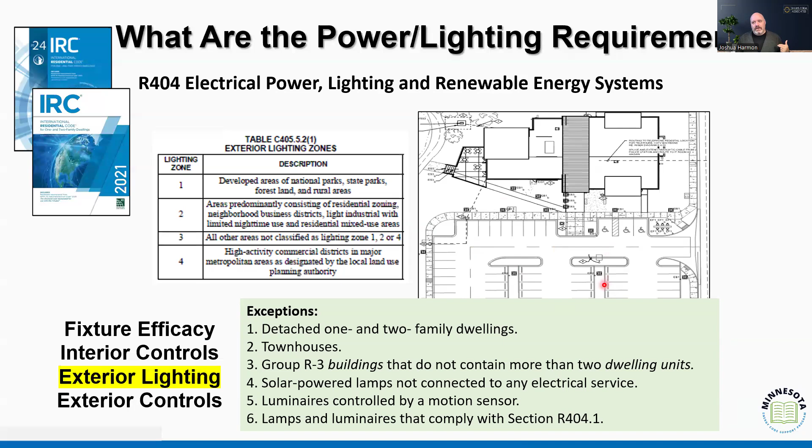Exterior lighting, again in the 2021 and the 2024, is really not for individual detached one- or two-family dwellings. So that's probably not our RRC 1s, 2s, 3s, 4s. That's more for those group R3 buildings, the more residential multifamily, those large scale multifamily. We're looking then at things like facade lighting versus parking lighting, we start to differentiate. And what it really does is push us back to the commercial code. So if we've got a multifamily operating multiple units, this is a townhouse scenario—you've got a 2-car, 1-car, 2-car garage setup, you've got exterior lights, they have to operate on astronomic photo cells.

For their downlights, if there's going to be exterior lighting, that has to be on its own special control, because again it shouldn't be on all night just because I forgot. Now, my light control for my exterior light is inside the garage, so every night before I go to bed I have to open the door to the garage to make sure the light's off, to make sure I don't leave my light on. That's not a requirement for residential traditional single-family structures, it's for when we do the large-scale multifamily. Same thing when it comes to parking lights, parking lot controls and stuff like that.

Photo cell controls to make sure that we don't have parking lots at a large multifamily structure lit all night, all day, when there's no need for lights. So again, just having those controls in place.

Remember, 90% of what the codes in total are looking at are levels of control. How do I control energy consumption? How do I control thermal loss and heat loss? And if I paid to heat and cool this building, I want to control it.

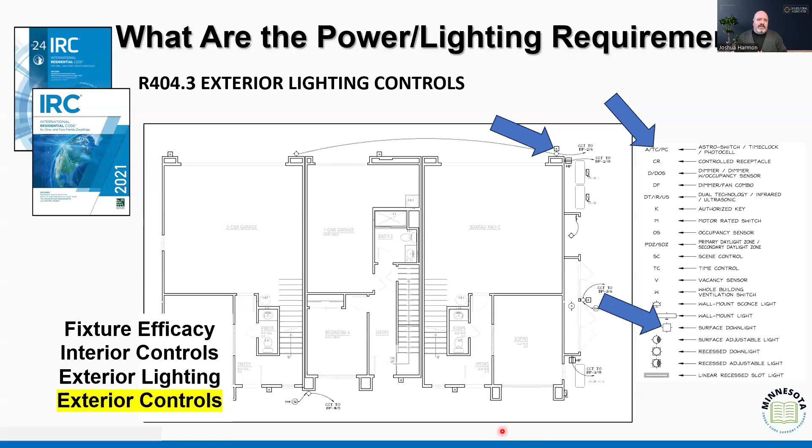If that means telling my kid to shut the door for 3 extra minutes, that's what I have to do. If it means something structural, like proper window installation, sealing and flashing, those considerations should be included in the plan and evaluated and verified by the building department. So what's missing in this conversation?

Not much for the residential 12. In the 21, 24, we get into additional efficiency packages, which is a whole new ball of wax and a big conversation we'll be having a lot in the future. It's much deeper than we can do in 2 minutes, so I wasn't even going to try.